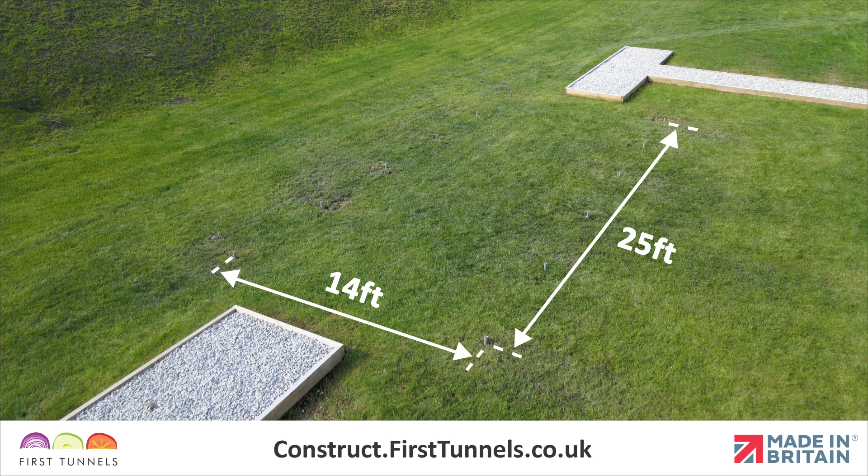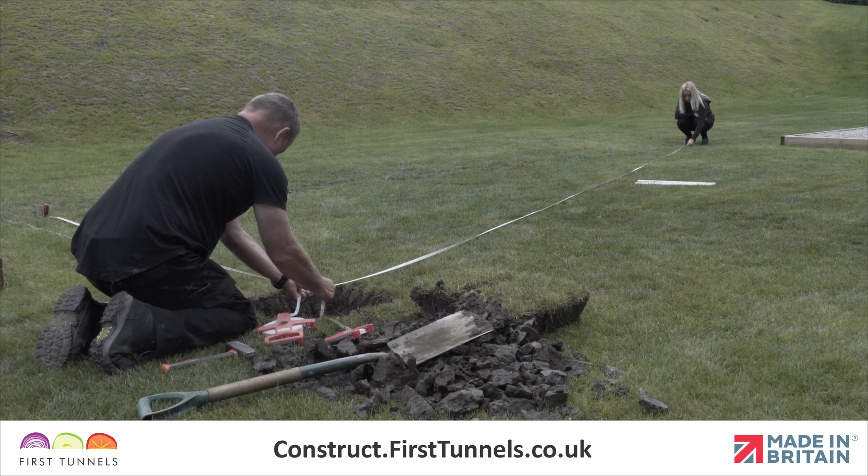Setting the foundations is an essential part of constructing your polytunnel. Taking your time to set your polytunnel foundations correctly will ultimately result in a more robust polytunnel that performs well and looks good. Here are the parts you'll need.

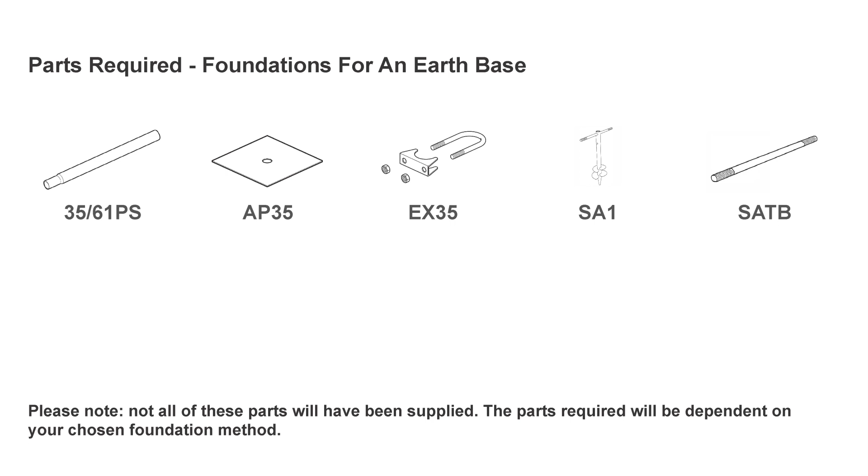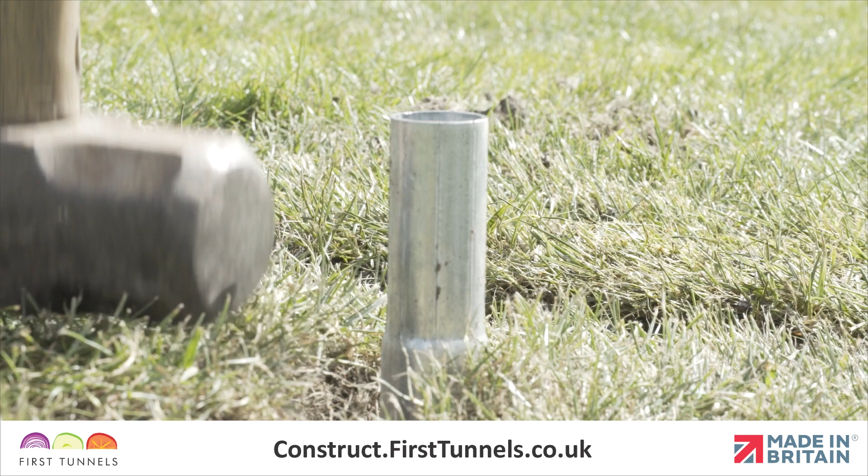All of your polytunnel foundations should be in line, evenly spaced, and consistent in height. To get started, we're going to position the four corner foundations. If you are using anchor plates or concrete, the swaged end of the foundation tube should be out of the ground when set. At this stage, we are temporarily positioning the foundations to make sure we have the right measurements, so only push them into the ground enough to steady them.

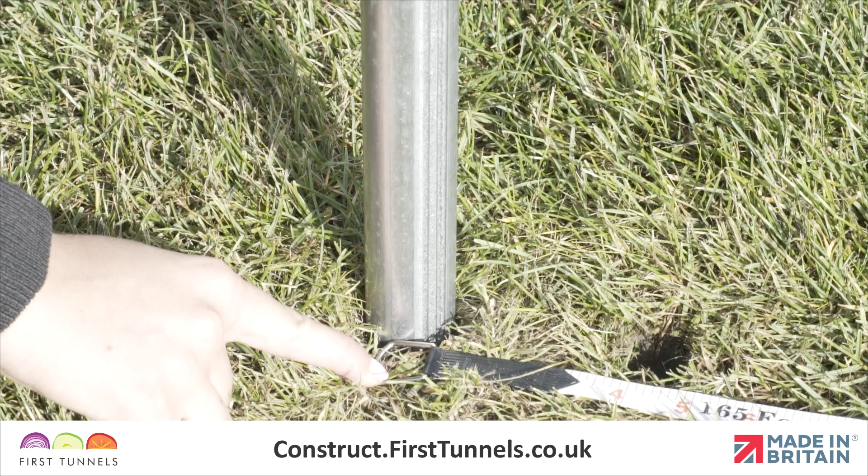Take all measurements from the tube centers. Choose a corner and position the first foundation. From this corner, measure down the length of your polytunnel and position the second foundation where your polytunnel ends.

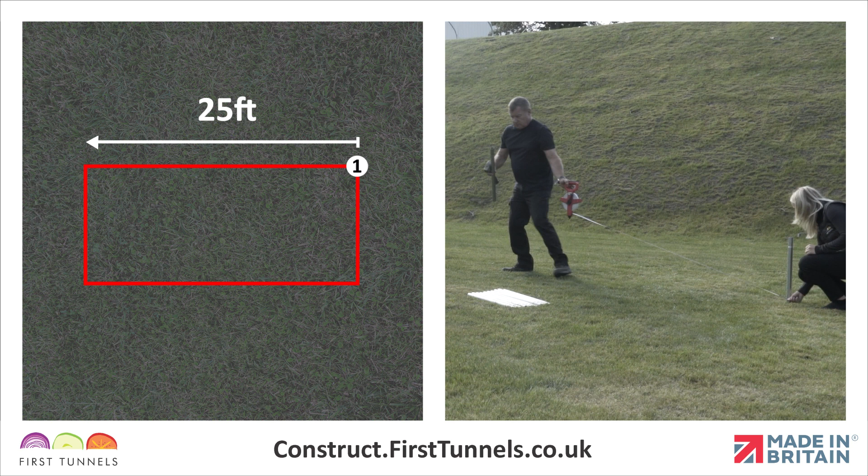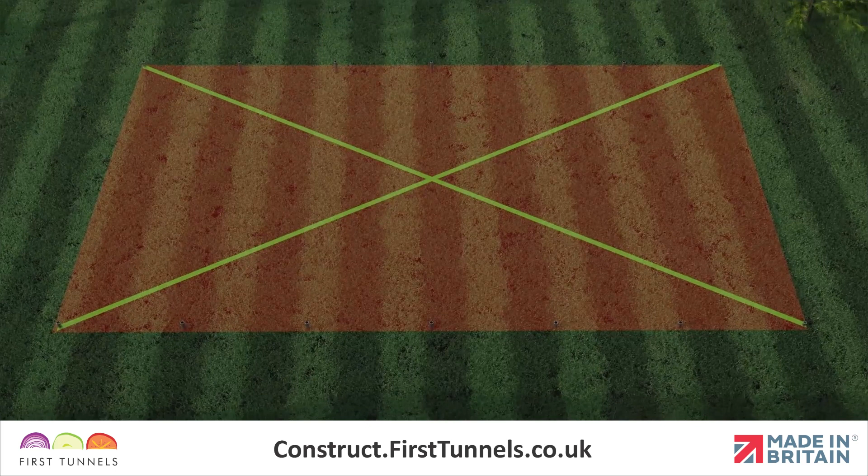It is essential that your foundations are set square. This can be achieved by ensuring that both diagonal measurements from corner to corner are equal. This measurement is different for different sizes of polytunnel. We have listed the diagonal measurements in your construction booklet.

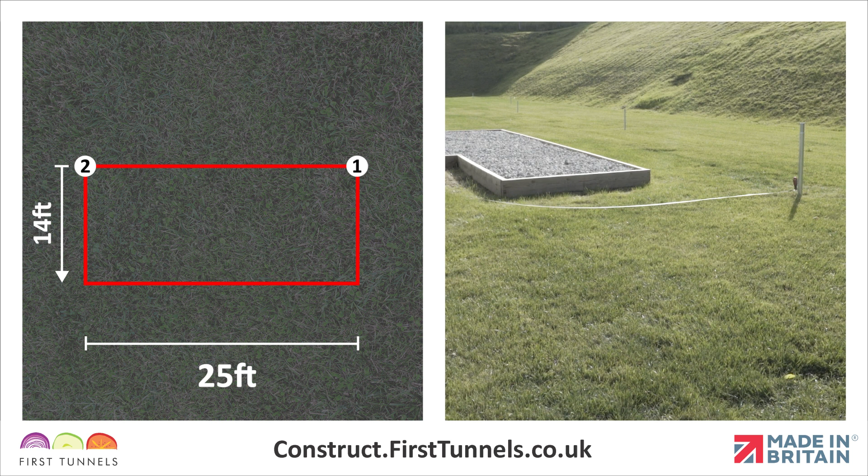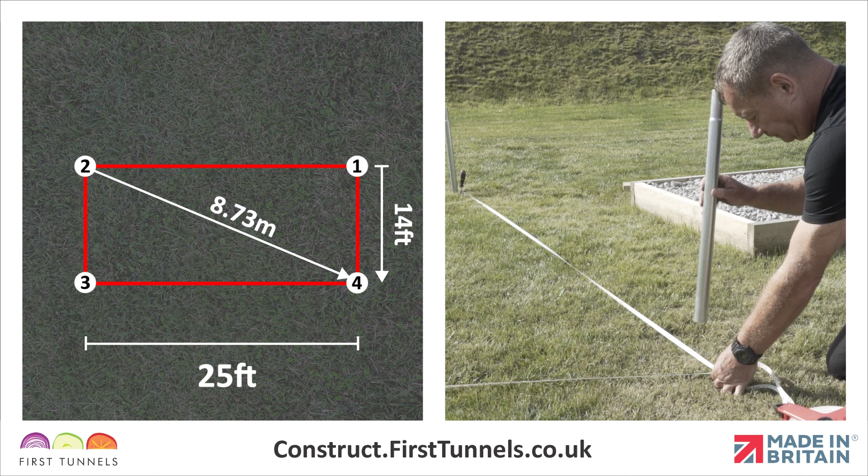Using two tape measures in tandem, measure 14 foot across the width from the second corner and diagonally from the first corner to position the third corner foundation. Repeat this procedure to position the final corner foundation. Finally, double check that the measurement between number 3 and 4 corners is correct for your length of polytunnel.

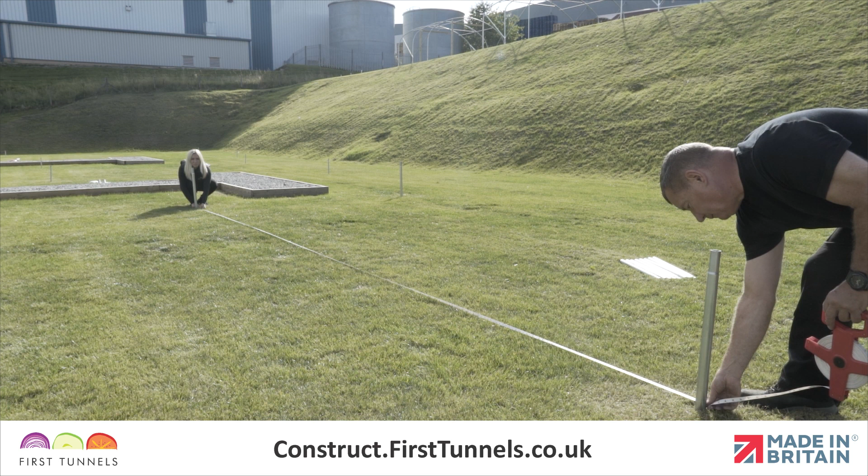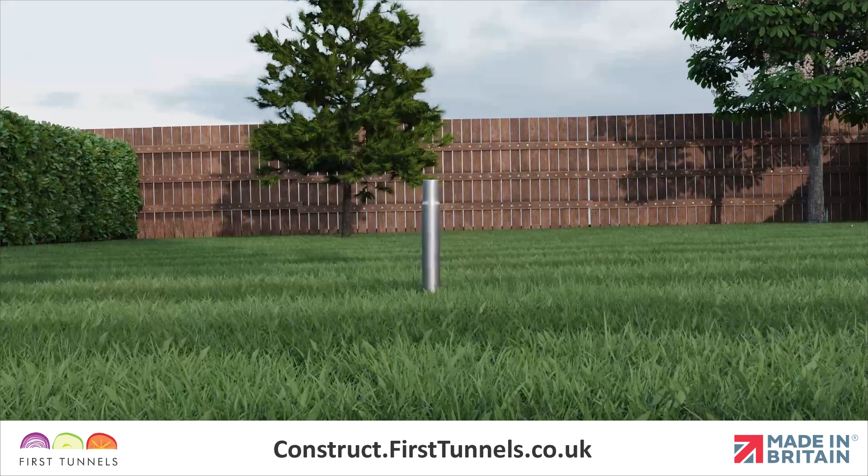Now your corner foundations are in position and square, you should now check that the site is level. A slope along the polytunnel's length is not an issue. However, if the site slopes across the width, then the foundations on the lower side will need raising out of the ground until they are level with the other side. This is to ensure that the hoops are vertical.

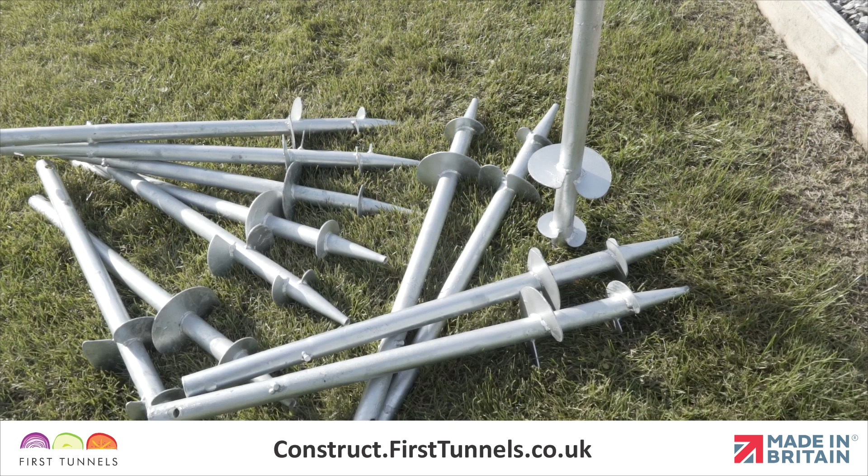We suggest that the foundations are raised no more than 15 centimeters, as you require enough foundation to be secured into the ground. Screw anchors will not be suitable if they require to protrude more than 15 centimeters. We can supply longer foundation tubes if required.

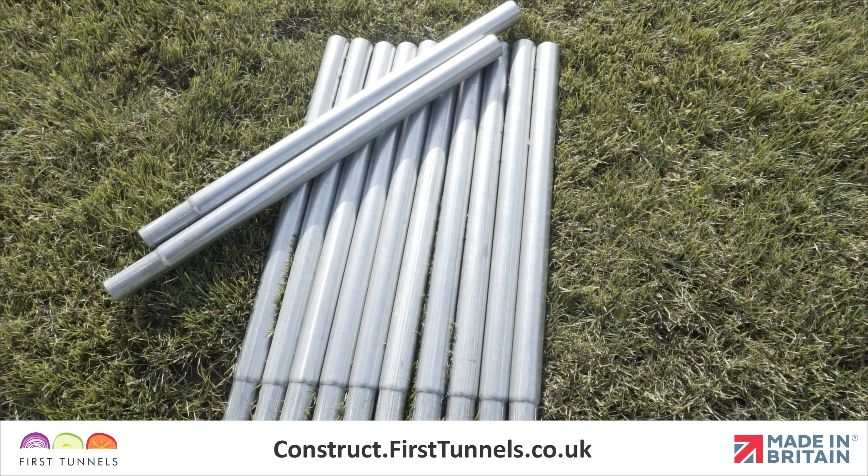Checking the degree of the slope can be achieved by running a taut string line from the base of a corner foundation across the width. Delicately holding a spirit level on the string line or using a line level can determine the slope. If a slope exists, you must start by fitting the foundations on the side that is the highest first.

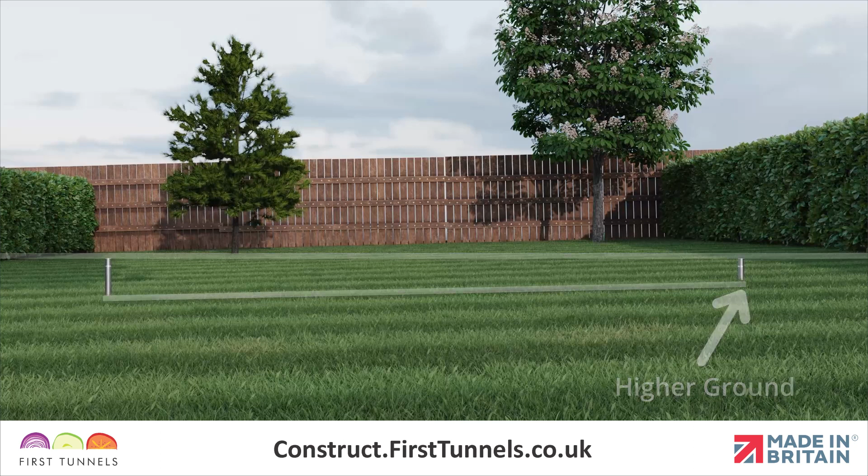We will now show you how to secure the foundations into the ground. If you are using anchor plates or concrete, you will be required to measure around the foundation tube and excavate a 40 cm square by 45 cm deep hole. This means you'll be required to remeasure the position of the foundation tubes using the methods demonstrated earlier.

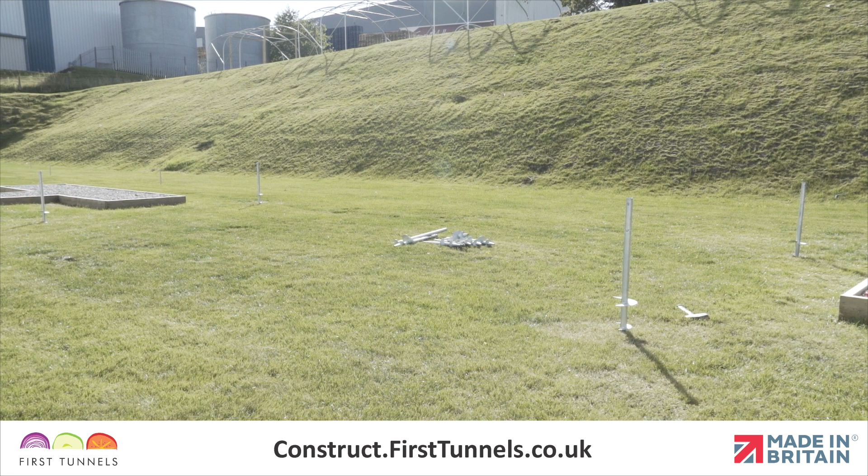If using screw anchors or simply knocking the foundations into the ground, the two corners on the higher side can be screwed or knocked into the ground.

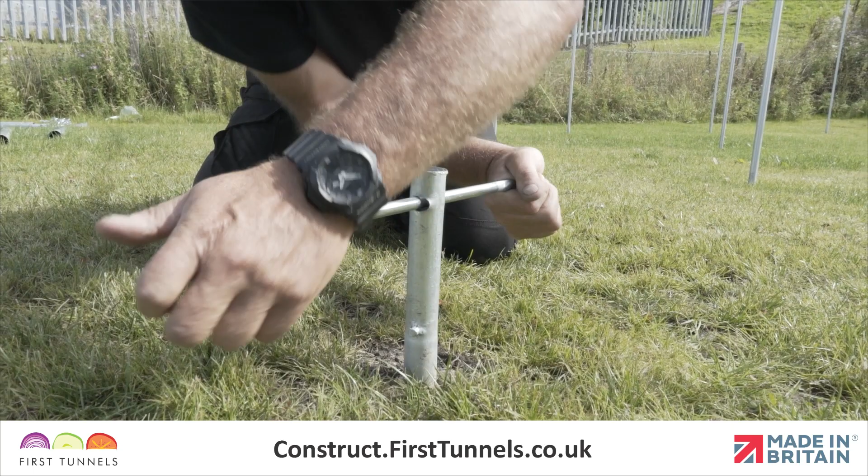For screw anchors, simply slot the turning bar through the tube and start turning clockwise until the bar stop is at ground level. If the site is level, then all four corners can be fixed. If the site is not level, we demonstrate how to determine the height of the foundations on the lower side later in this video.

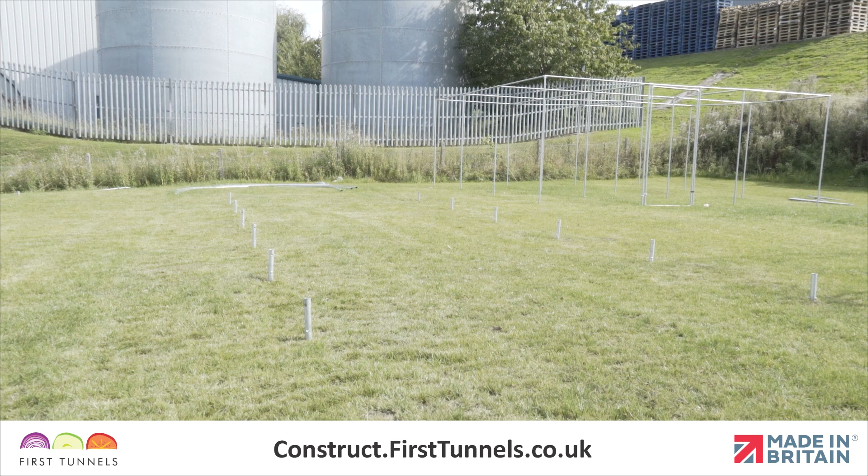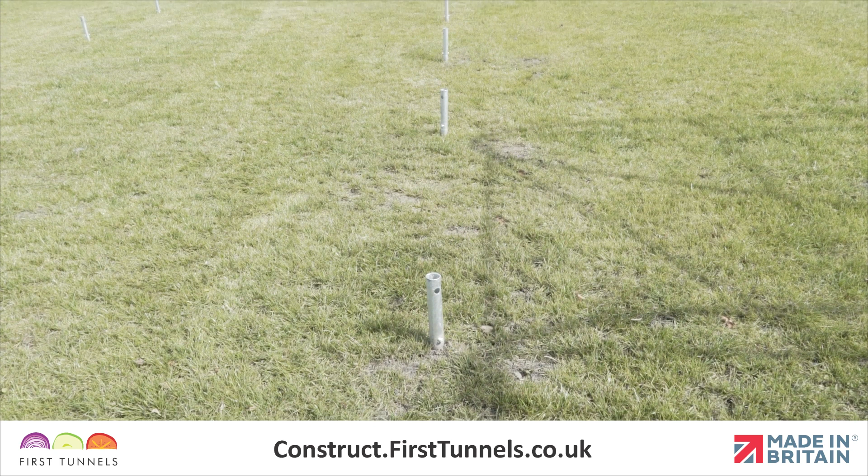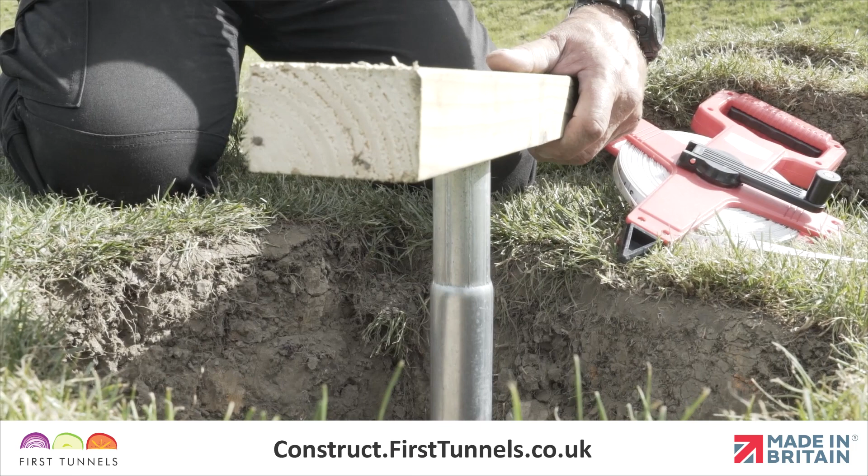If you have found that your ground has high stone or rubble content, you'll be required to excavate a hole and secure your screw anchors with concrete. Reposition the foundation tubes using the method demonstrated earlier. The base of the hole can be used to hold the foundation tube in place. Protecting the swaged end with a piece of timber, knock the foundation tube into the base of the hole. The base of the swage should be set at ground level. Use a piece of timber to lay over the hole as a guide.

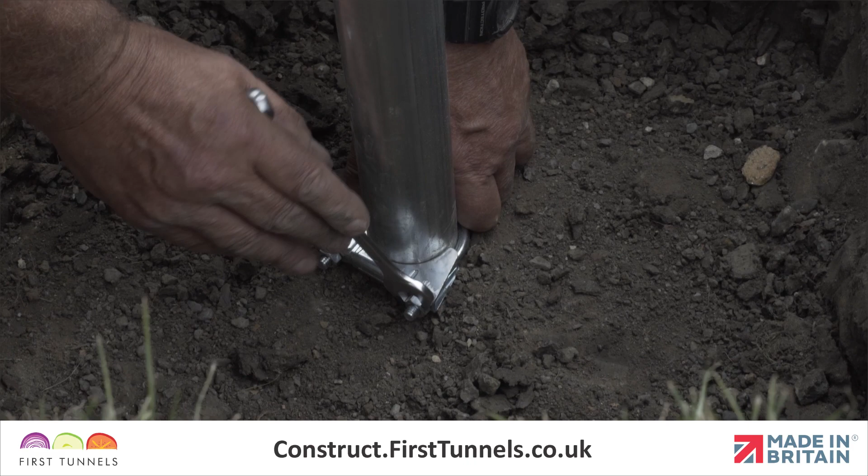Now we will show you how to secure foundations using anchor plates. Secure an exhaust clamp to the bottom of the foundation tube using a 13mm spanner. Slide an anchor plate down the foundation tube to meet the clamp and then secure another exhaust clamp on top. Now you can backfill the hole, packing the soil as you go.

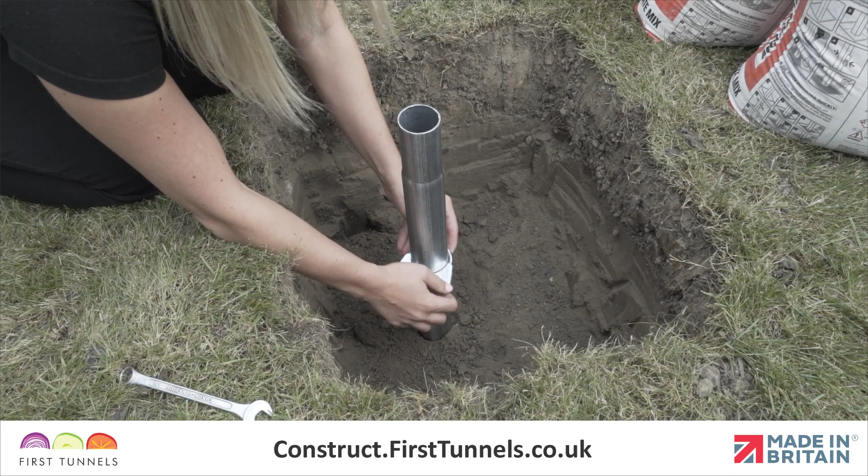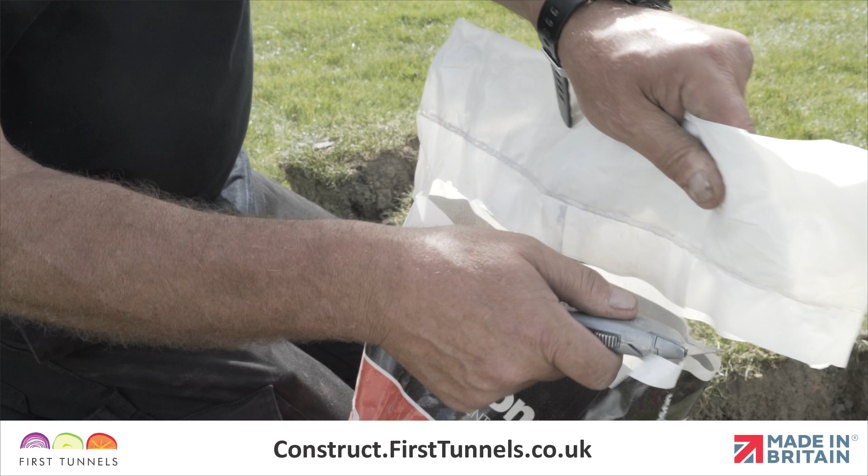Now we're going to demonstrate securing the polytunnel foundations using concrete. Secure an exhaust clamp approximately 2/3 down the tube. The clamp prevents the unlikely instance of the tube sliding out of the concrete block. We suggest using concrete that is 1 part cement and 5 part aggregate. We also recommend postcrete. This ready-made mix is supplied in 20kg bags and you simply add water. Approximately 2 bags per hole will be required.

We have now shown you how to secure the first foundation in position using anchor plates or concrete. We will now proceed to secure the 3 remaining corner foundations. For the second corner, use 2 tapes in tandem to reposition the foundation and secure using anchor plates or concrete. We will now secure the third corner.

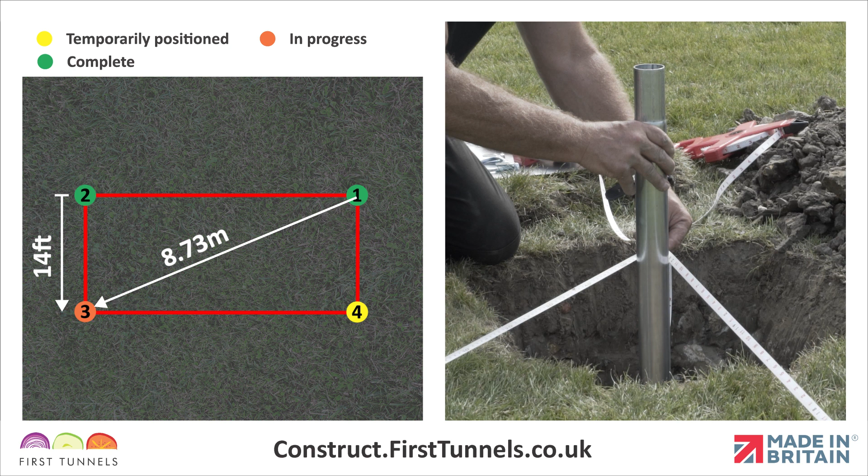The foundations on the opposite side of your polytunnel must be sat level across the width. This may require setting the foundations higher out of the ground. If using anchor plates or concrete, excavate a hole and reposition the third corner foundation using the methods described earlier.

To ensure the foundation tube is set level across the 14-foot width, tie a string line to the second foundation tube close to the top. Adjust the height of the foundation tube to the correct level across the width. You may be required to return back some of the hole spoil to accommodate this. Once the third foundation is the correct height and position, secure it into the ground using anchor plates or concrete.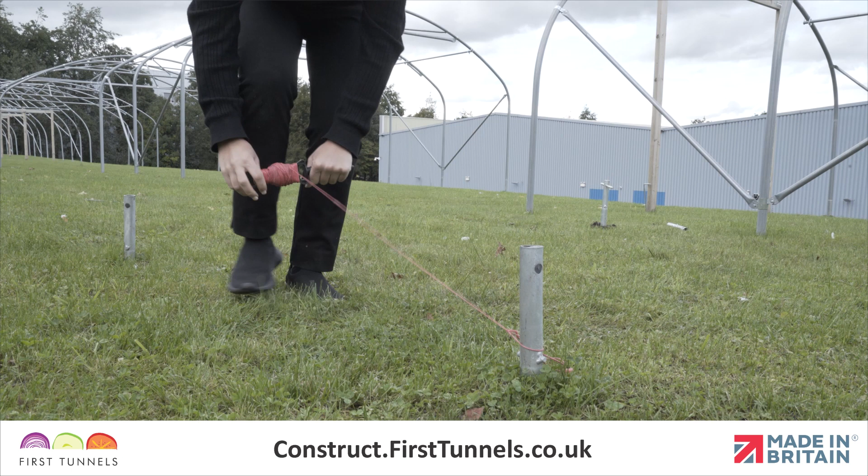If your site is not level and you are using screw anchors, tie the string line just above the bar stop. Pull the string line across the width and screw the fourth corner screw anchor into the ground until both bar stops are level.

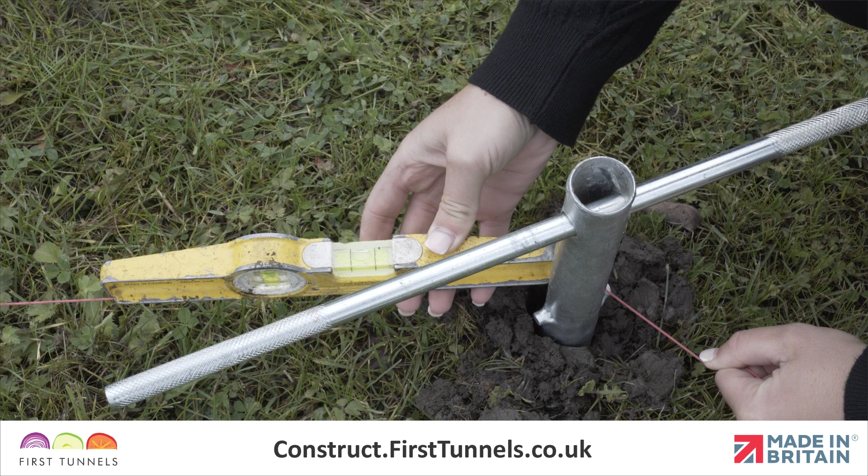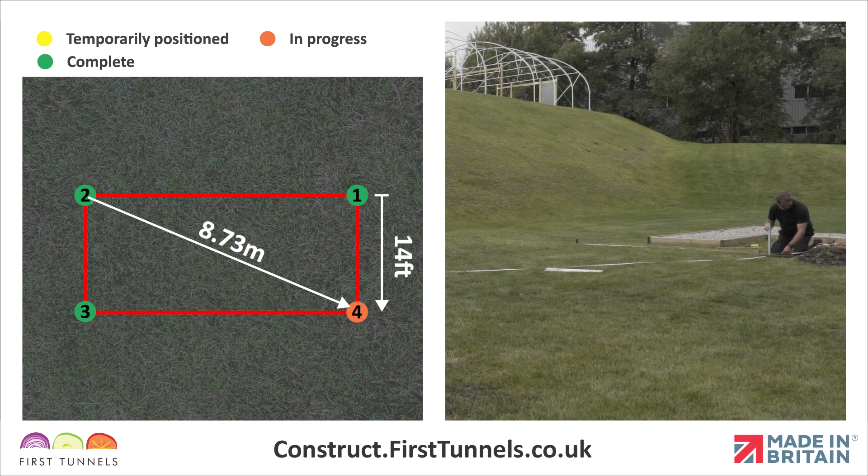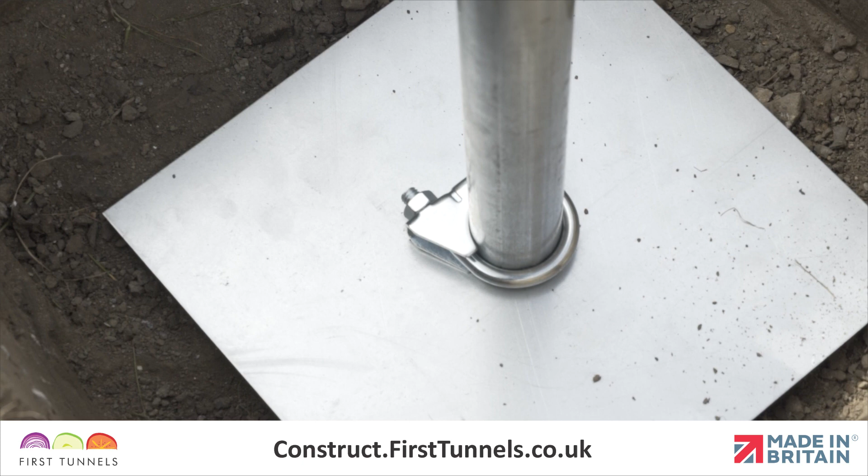We will now reposition and secure the final corner foundation. If using anchor plates or concrete, excavate a hole and reposition the fourth corner foundation using the methods described earlier. Tie a string line from the first corner foundation and pull it taut across the width to ensure the fourth foundation is level with the first foundation and secure it into the ground. We have now positioned and secured all 4 corner foundations. You can now install the intermediate foundations.

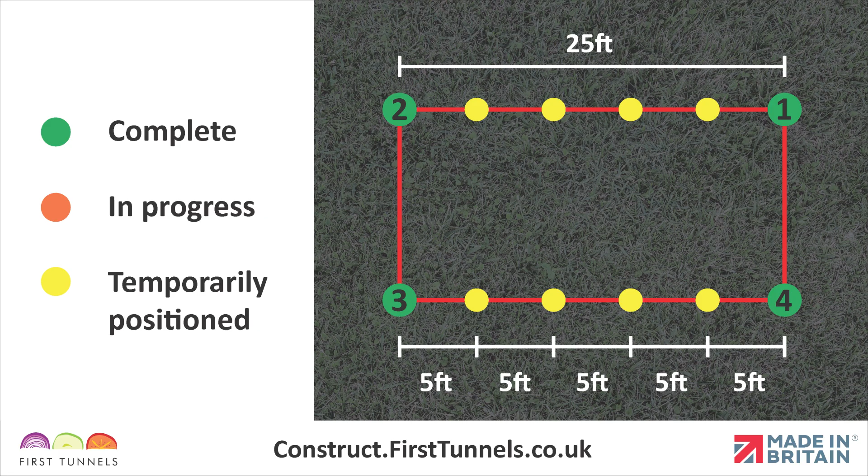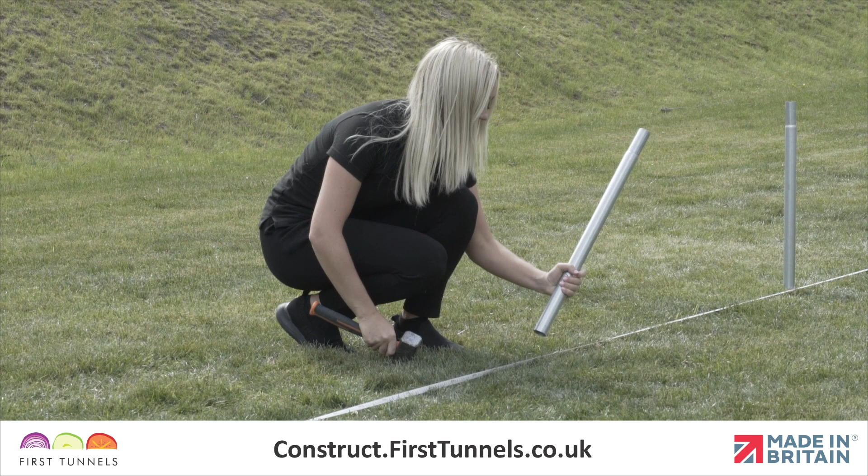Use a measuring tape to position intermediate foundations at 5-foot spacings. If using anchor plates or concrete, excavate a 40cm square by 45cm deep hole for each foundation. Use a taut string line between the 2 corner foundations to ensure the intermediate foundations are consistent in height and in line. Reposition the intermediate foundations in the hole and secure using anchor plates or concrete.

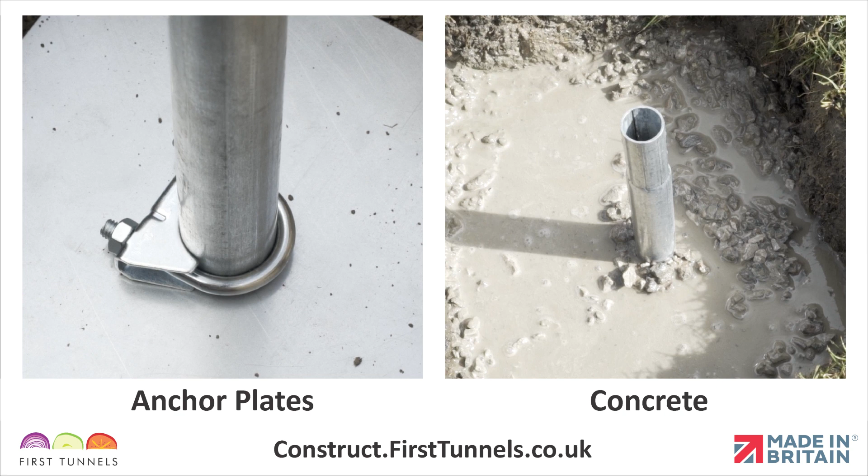If you are using screw anchors, position them and screw them into the ground using the same method as earlier, ensuring that they are level. Now we are ready to repeat on the opposite side.